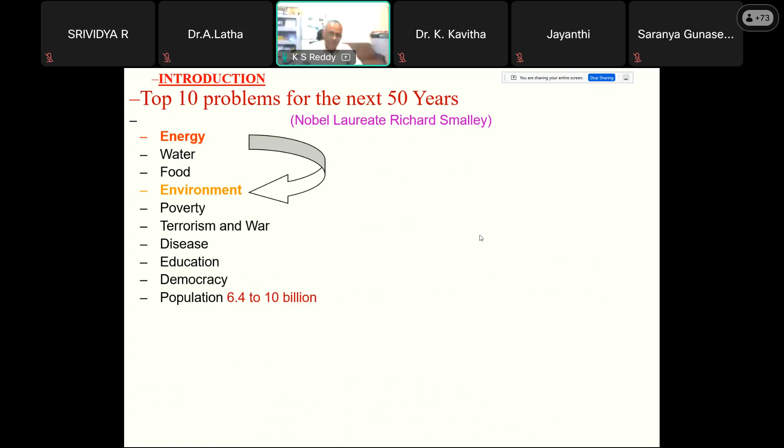If you look at it, we are facing several problems, and if you summarize these problems for the next 50 years, we have energy, water, food, environment, poverty, terrorism and war, diseases, education, democracy and population. These are all problems which are facing across the world, but the topmost one is energy. And if you try to address the problem of energy, we have to also address the problem of environment. Energy problem cannot be addressed in isolation. So therefore, energy and environment, they go together.

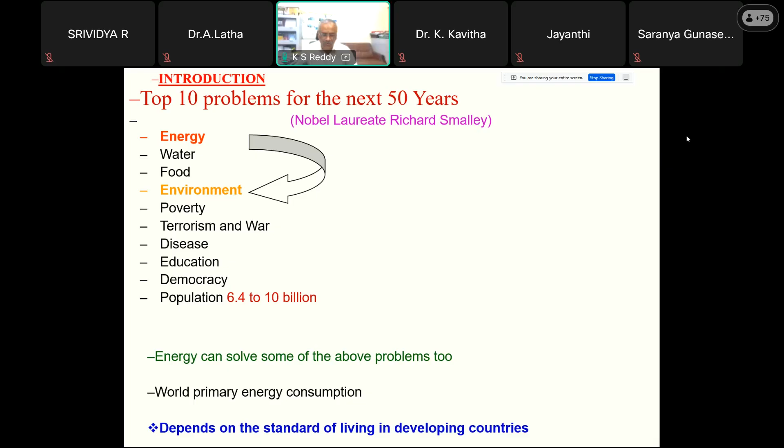Energy can solve some of these problems, and world's primary energy consumption is rapidly increasing based on per capita energy consumption, improving standard of living, industrialization, and population growth. Any nation's standard of living is primarily dependent on energy consumption. If a particular country or individual consumes more energy, that means it is more wealthy. Therefore, energy is one of the primary indicators of standard of living.

If you look at energy sources, there are broadly two types. One is celestial or income energy, which comes from outer space to Earth's atmosphere. These incoming energies include solar and lunar energies, which we refer to as non-depletable, including electromagnetic gravitational particle energy from stars, planets and the moon, and potential energy of meteorites entering Earth's atmosphere. But if you look at the quantum of energy reaching Earth's atmosphere, solar is the major fraction.

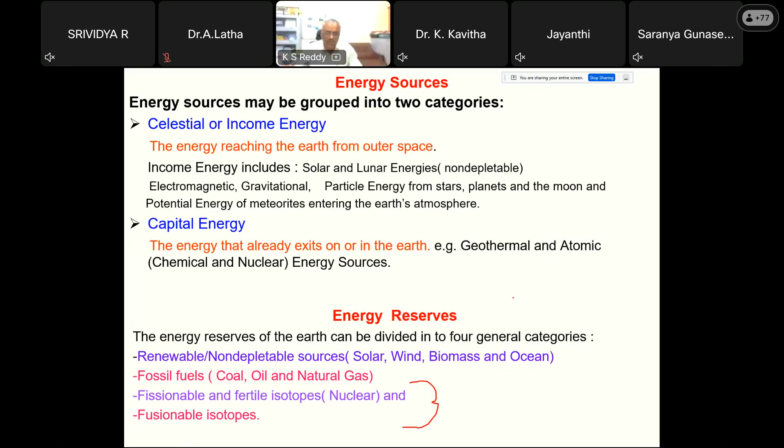Energy reserves are broadly divided into four categories: renewables, which are non-depletable sources like solar, wind, biomass and ocean; fossil fuels - coal, oil, gas; and nuclear, in both fission and fusion forms. Nuclear energy in India is gaining momentum, as in this budget a substantial amount has been allocated for nuclear reactor design and development, mainly for smaller reactors. If you look at the energy system hierarchy, we have energy sources including fossil fuels like oil, gas and coal, biomass, nuclear and renewable energies.

These are transformed into secondary energy carriers, either electricity or liquid fuels, and ultimately they have to be used as per the consumer choice, either for mobility or buildings. But in this conversion process, greenhouse gas emission is an important factor.

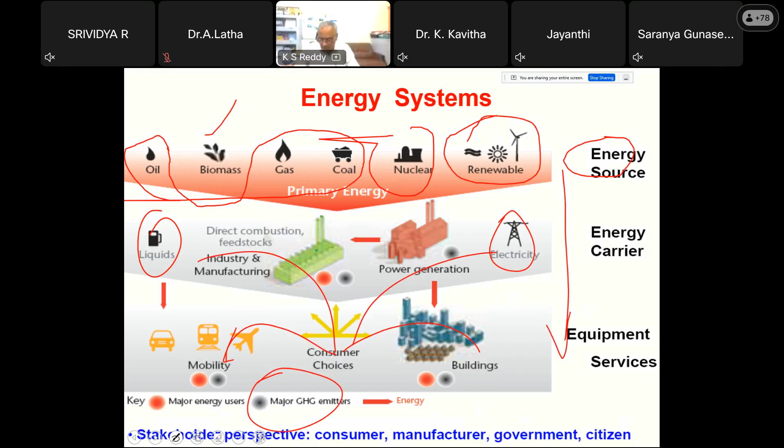If you look at these energy services and sources through the timeline, industrialization started in the 1870s, and pre-industrialization there was no commercial use of fossil fuels. Coal started being utilized in the 1870s. If you look 100 years back, in 1770, there were no fossil fuels - it was primarily animal power, with hay as input, and the production of this fuel is primarily from sunlight.

After industrialization, commercial utilization of fossil fuels like coal and gasoline started every 100 years. Now, if you look at the pathway from fossil fuels - high calorific value fuel to low calorific value fuel to high calorific value - if you look at coal, oil, gas, these fuels are hydrocarbons, and hydrogen content plays a substantial role. If you increase the hydrogen content, that means it's a better fuel, so instead of having one constituent in a fuel, it's better to go for complete hydrogen.

Therefore, in future, by 2070, the Indian target is to achieve net zero condition, so hydrogen is going to be one of the major fuels for the future. If you produce this hydrogen by renewable energy, then it's called green hydrogen. So in a smart energy environment ecosystem, hydrogen plays one of the key roles. Hydrogen economy is a major player in the future energy scenario. We talk about India's net zero scenario, and now we are talking about 2047, which is a developed nation.

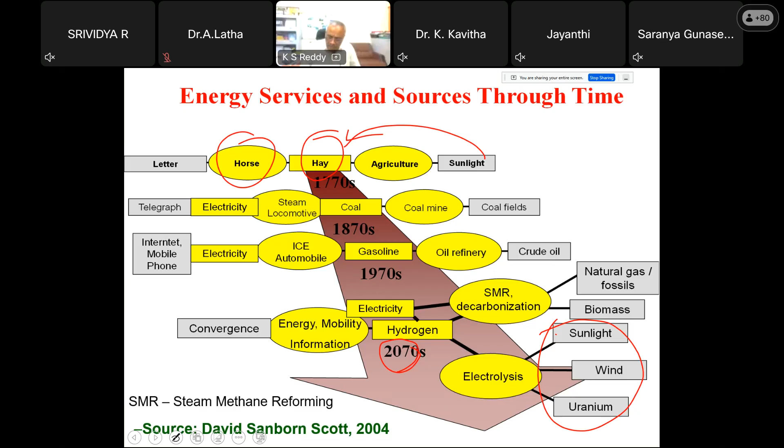So therefore, in this developed nation, sustainable energy solutions can play a major role to make energy sustainability.

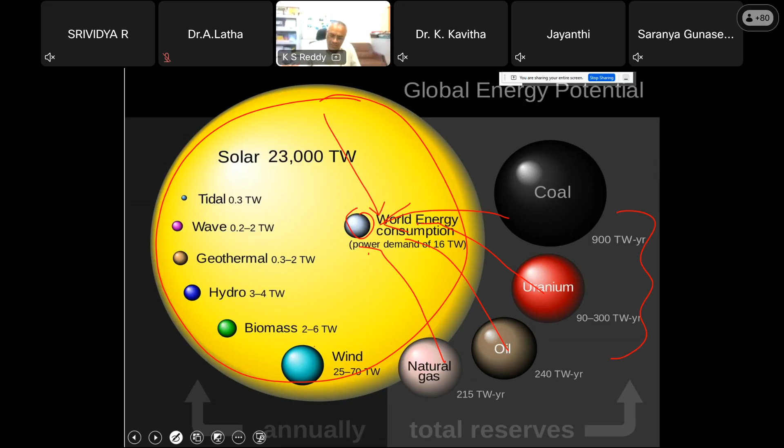If you look at the global energy potential with the present energy consumption, this consumption is being met by various energy sources. Each circle represents these quantities, but the demand is one here. If you look at the bigger circle, which is solar, it is infinite and inexhaustible, and can supply indefinitely to the world's energy source. So therefore, the renewable energy sources play a substantial role for the future energy scenario.

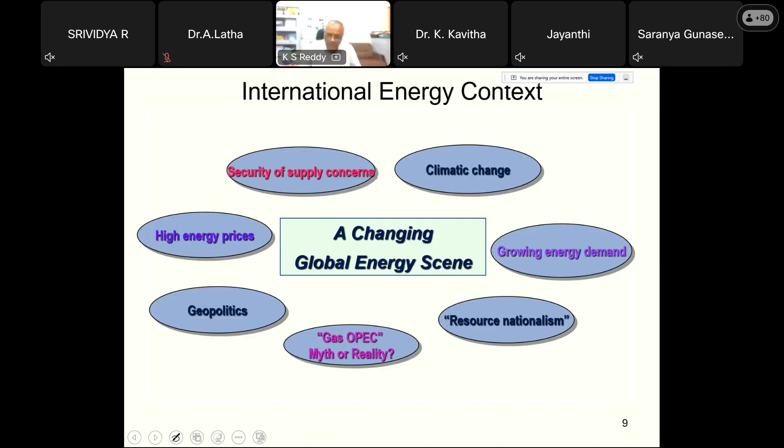If you look at in an international context how the global energy scene is changing, as you know, geopolitical instability and geopolitical unrest are playing a major role as far as the energy scene is concerned. You have high energy prices, security of supply concerns, growing energy demand, climate change, geopolitics and resource nationalism, all as major issues. And again, OPEC countries and oil price volatility is another major issue.

So this energy supply is primarily driven by goals and drivers. The goals of energy are accessibility, availability, acceptability, and the GDP drivers are GDP, energy demand, and energy supply. These are dynamically balanced with various other factors like demography, environment, institutions, pricing, and technologies. So therefore, the energy scene is primarily driven by its goals and drivers, and various other factors.

So generally, I propose a 6A criteria for the energy scenario: accessibility, affordability, acceptability, adaptability, appropriateness, and assurability are the major factors which govern the energy supply and energy demand.

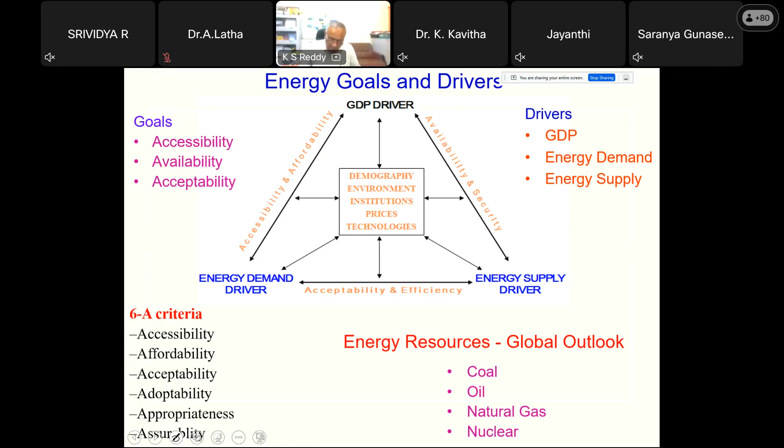So if you look at energy reserves at the globe, coal, oil, gas, and nuclear are some of these, which are now predominantly supplying the global energy demand. But of course, renewable plays an important role, though it's gaining momentum slowly. So in future, we expect the renewable energy sector to play a substantial role, especially in smart environment conditions.

So the current oil reserve to production ratio - oil is one of the fossil fuels. If you look at oil's current reserve to production ratio, it's somewhere around 40 years. After 40 years, we don't know what the situation of oil will be. If we consume or produce at the same rate as present, world oil can last another 40 years.

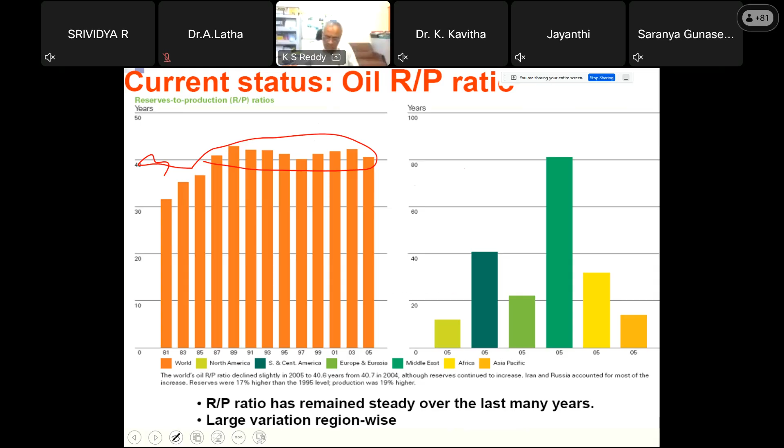So therefore, after that, what happens? And even if you consume indiscriminately, what is the effect of this on the environment? So then we need to go for new resources, new fossil fuel resources. That means we have to go deeper and deeper. And as you go deeper, you may find new resources, but ultimately the cost of production will also increase, and at one stage it may not be viable.

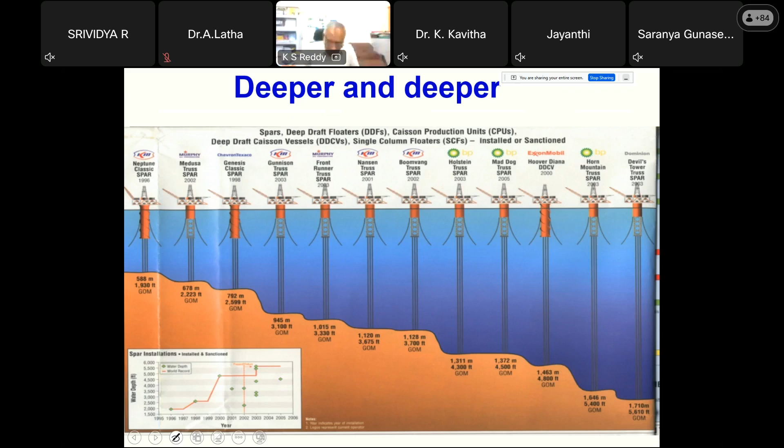So sustainability is a major factor in any energy source reaching the end user or end of the chain. We feel we deserve a sophisticated, luxury kind of environment where we get all the energy resources at our disposal, but the problem is the security of supply is a major concern.

To avoid this, we have to go for sustainability. The earth is bluish in color when viewed from a distance, surrounded by the atmosphere. We are consuming energy indiscriminately on the earth's surface, and because of that, the earth's atmosphere is getting imbalanced — we are overloading it with pollutants, so it is getting disturbed.

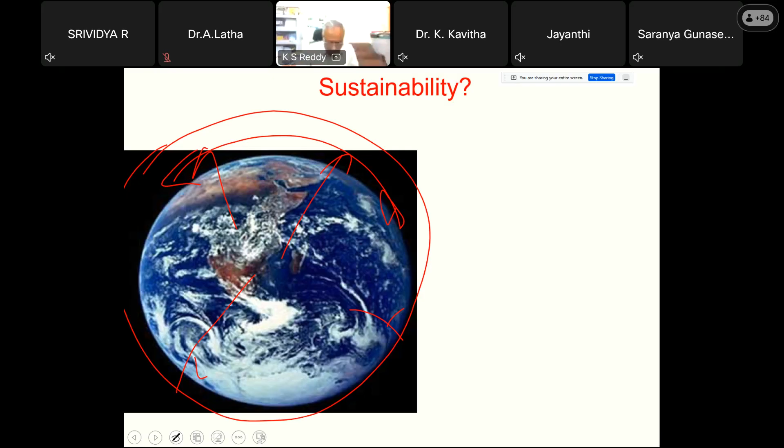Climate change is a major challenge. Recently you have seen the Californian fire and how it played a major role, and how Indian weather conditions are changing. Climate change is very important. Any overloading is a dangerous phenomenon — if you overload any system, it will get imbalanced. If you pollute too much, even our Delhi weather conditions will get disturbed.

Therefore, energy resources sustainability is very important, and resources are limited. Without technology, they will extinct after some time, so we have to go for technology. This technology keeps these resources for the future, so sustainable development is an important criteria here.

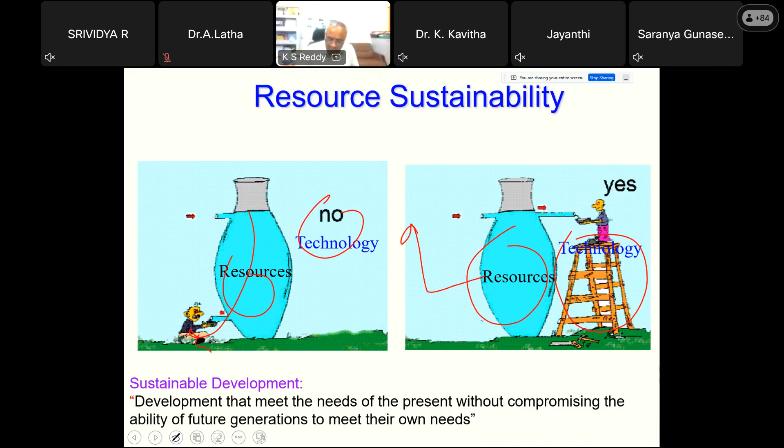Sustainable development means the development that meets the needs of the present without compromising the ability of future generations to meet their own needs. That means you consume your share, but keep the future generation's share as it is. Otherwise, it will get imbalanced and the future generation will be in trouble. So as far as energy sources are concerned, please try to consume your own share — that is what we can attain.

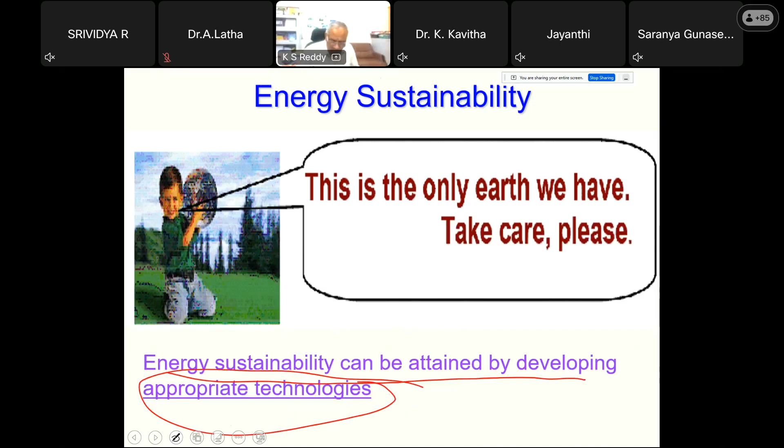The future generation says there is only one earth, take care of it please. So energy sustainability can be attained by developing appropriate indigenous technologies — it's your technology, your nation, your technology can cater to your needs. So what to do? It's your money, your environment, your mission readiness.

So you have to conserve your earth, otherwise it will have substantial climatic impacts. The right thing to do is go for renewable energy technologies for making smart conditions. There are several renewable energy technologies, and renewable energy technologies are mainly solar energy technologies.

It's broadly classified into direct and indirect. All renewable energy technologies which are a manifestation of the sun's energy are called indirect renewable energy. Those include water power, wind power, biofuel, biomass, and ocean.

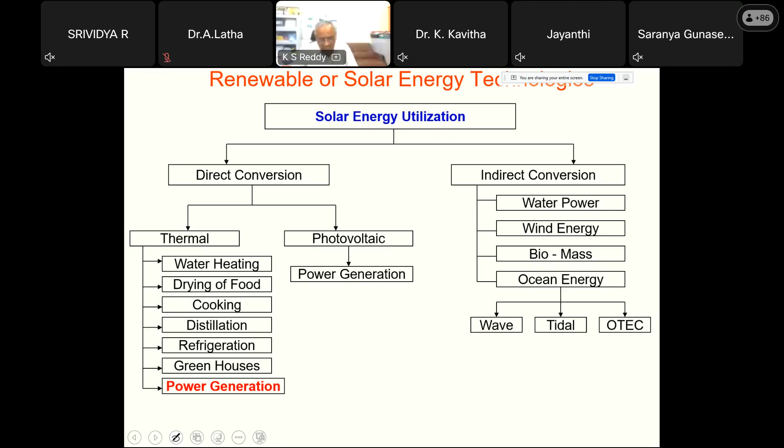Whereas there is direct energy conversion from solar to either thermal heat or photovoltaics to get electricity. The thermal route can be simpler and sometimes more efficient, but you need to convert it into high grade energy like work. The thermal conversion includes water heating, drying, food cooking, distillation, greenhouse applications, and power generation.

Sustainability is a very important aspect now. Renewable energy technologies can untangle the triple bond of development, energy, and environment. Sustainability is primarily governed by security of supplies, economic efficiency — that's the development — and environmental protection. We have to keep the environment safe and clean.

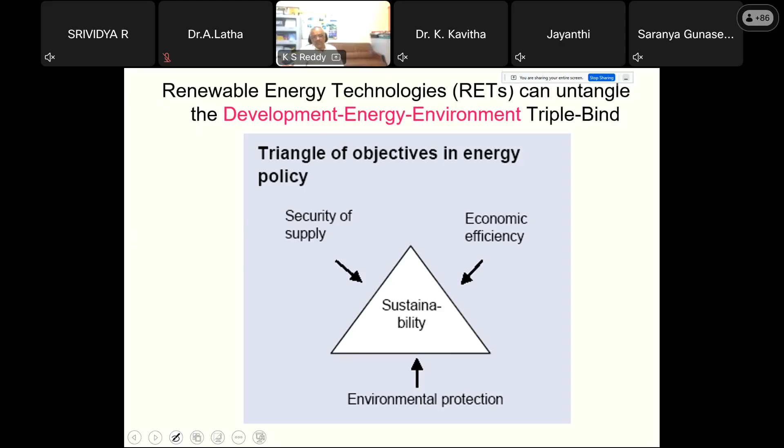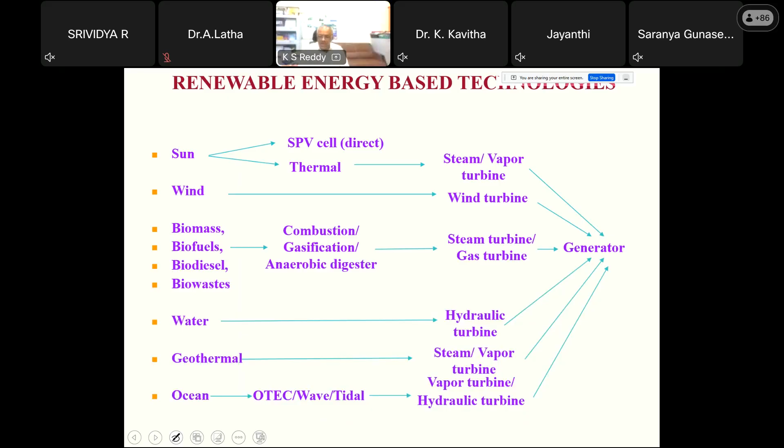Sustainability can be attained only through the development or implementation of renewable energy technologies. There are several renewable energy technologies: sun's energy, wind's energy, biomass and biofuels, biodiesel, bio-waste, water, geothermal, and ocean. Ultimately, they need to be converted into useful, high-quality energy by the generator.

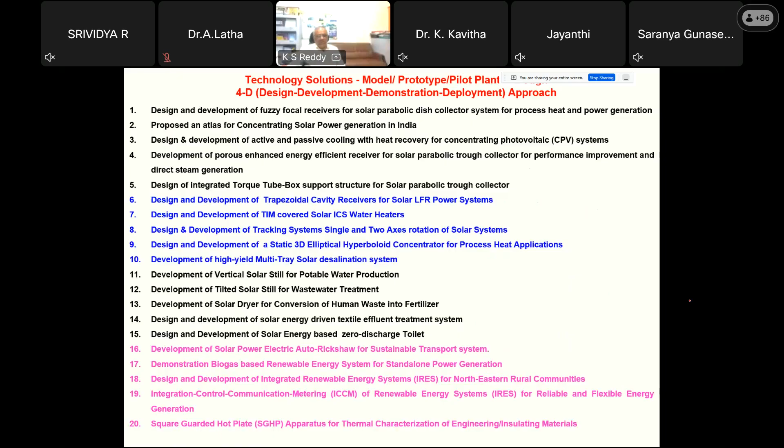As mentioned earlier, in a smart technology approach, we have developed several technologies in the solar system. These are a few technologies I've listed out. Our approach is a 4D approach: design, development, demonstration, deployment. Through this approach, we have developed several technologies, and I'll show you some of these.

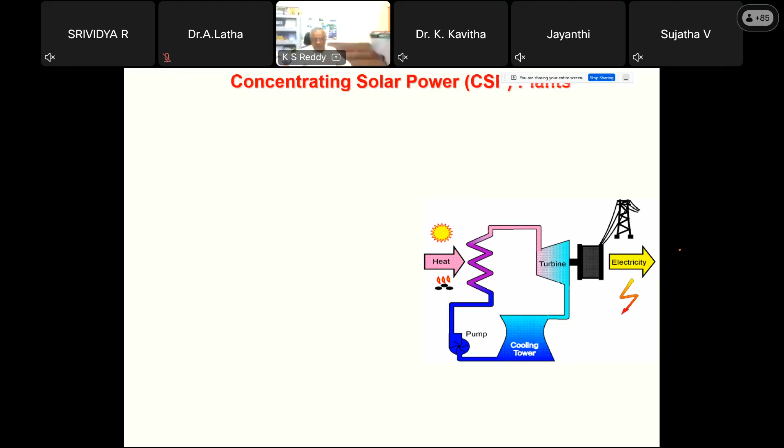As I mentioned, a sustainable environment is a major challenge. Now, power generation and electrical energy generation is primarily supplied by fossil fuels like coal. If you burn coal and produce power through a Rankine cycle, that is a conventional power plant. If you replace the fossil fuel with solar, then it is concentrating solar power.

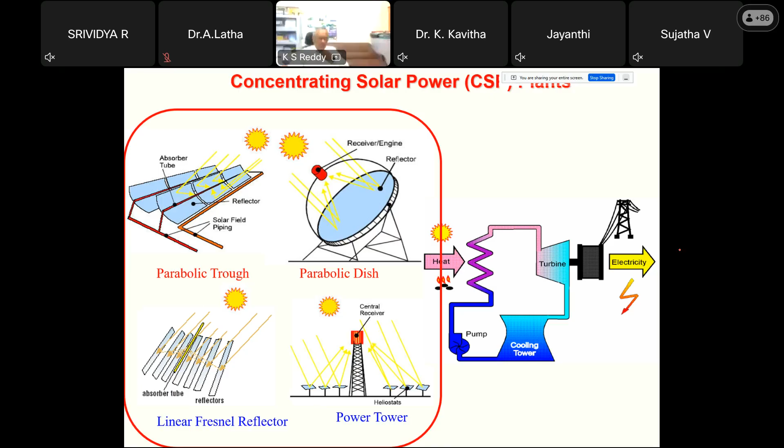There are 4 technologies that have reached the level of maturity to integrate into conventional or thermal power plants. These technologies, which include parabolic trough, parabolic dish, linear fresnel reflector, and power tower, play an important role. They have their own spaces in their technology domain, and some of them are more efficient, others less efficient, but ultimately they are instruments in making more sustainable power.

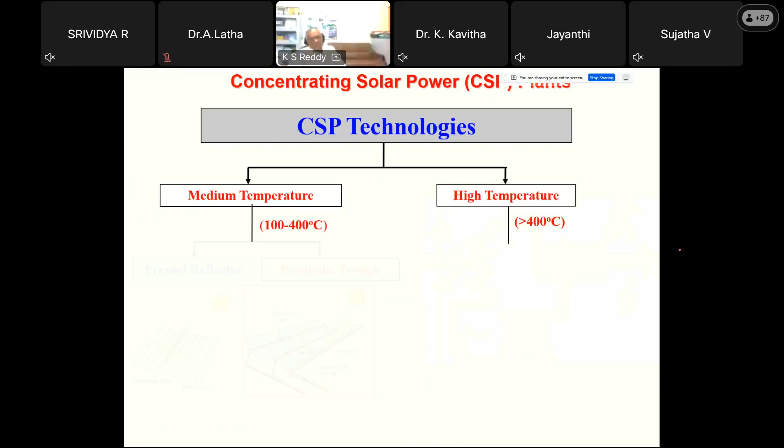The CSP technology, based on the temperature range, is broadly classified into 100 to 400 degrees and above 400. So high temperature and medium temperature energy is produced by these respective technologies for power generation. We developed these technologies at IIT Madras at different scales of operation.

Our approach is a 4D approach: design, development, demonstration, deployment. At the demonstration scale, we have a parabolic dish which produces 640 degrees Celsius at 15 kilowatt thermal and 67% efficiency.

We have a photovoltaic system with tracking, so it tracks the sun so that overall efficiency is higher. We have a desalination plant, parabolic trough collectors for process heating, concentrating photovoltaics for both electricity and water production, and instrumentation to measure that. So this is all at the demonstration scale.

These are largely demonstration scale technologies, and they can be taken to the field. We have transferred technologies to some industries where they have taken it to the field.

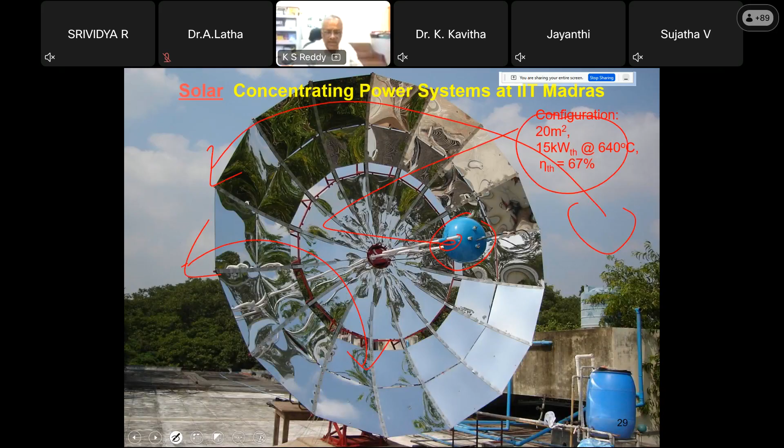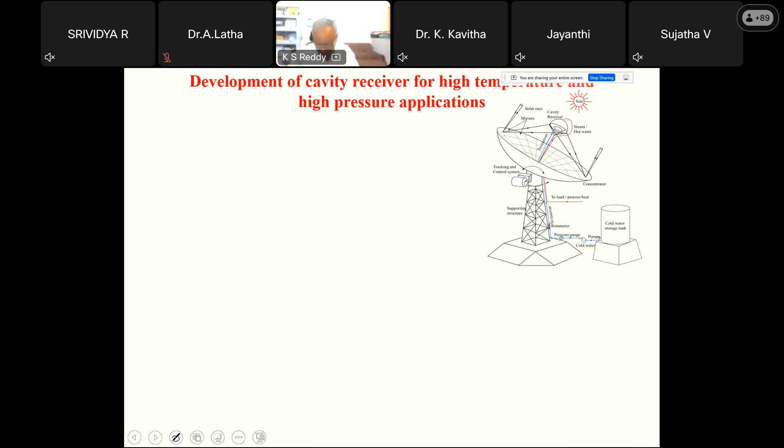Looking at the technology, a parabolic dish collector is a concentrator which produces high temperature heat by reflecting solar radiation onto a receiver. The specifications require that it be tracked as the sun moves from east to west. The tracking system keeps the solar collector in the direction of the sun, and the concentrated radiation comes to the receiver.

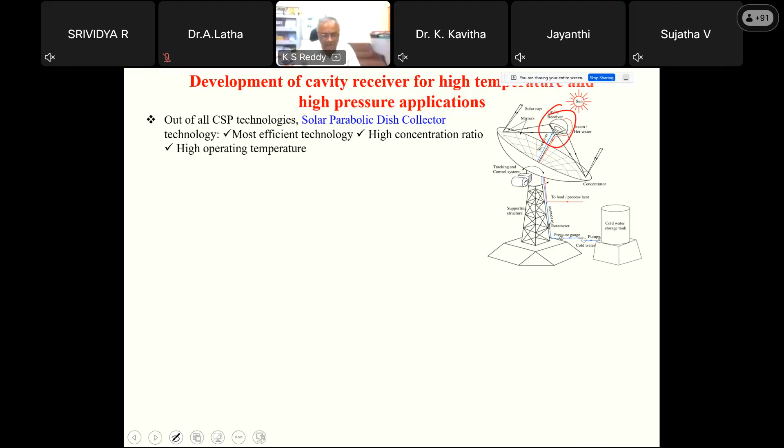The parabolic dish collector is the most efficient technology because we get higher temperatures. The design of the cavity receiver is important not only for production of heat but also for fuels production like hydrogen and so on.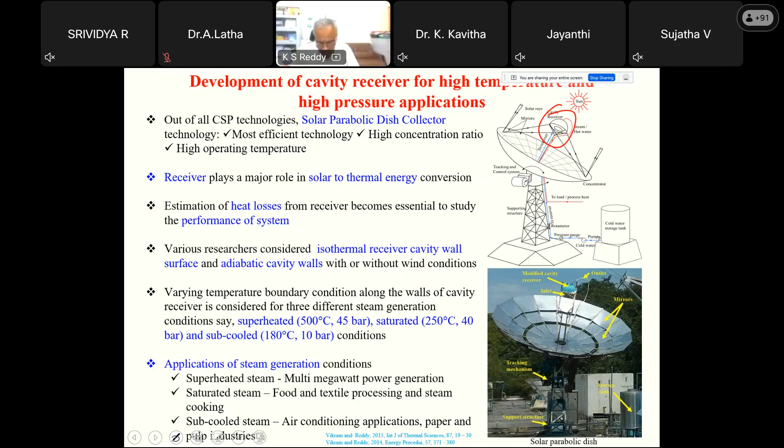When we go for large scale power generation, we need to go with the field, and land area requirement is a major challenge nowadays in India because land becomes expensive. So we cannot afford high land area for this. In order to minimize the land area, we did field analysis and studied operating conditions.

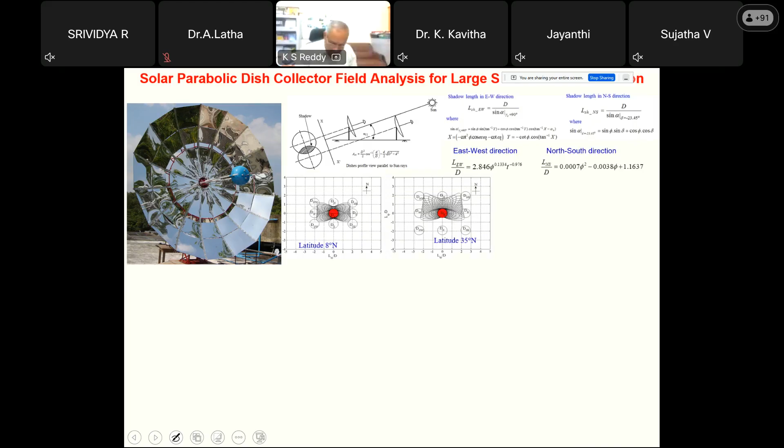We worked across the entire country, from Kanyakumari to Ladakh. Kanyakumari latitude is about 8 degrees north, and we studied up to 35 degrees north, and made an atlas to come up with power generation potential across India. Wherever the green points are, they are viable; blue points are conditionally viable; red ones are not viable at all.

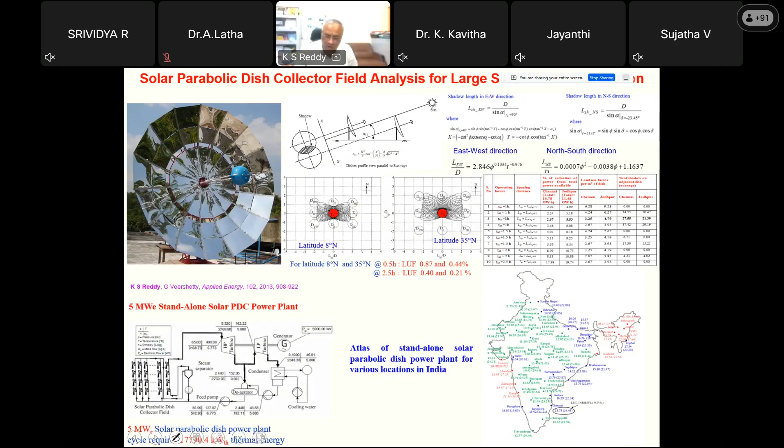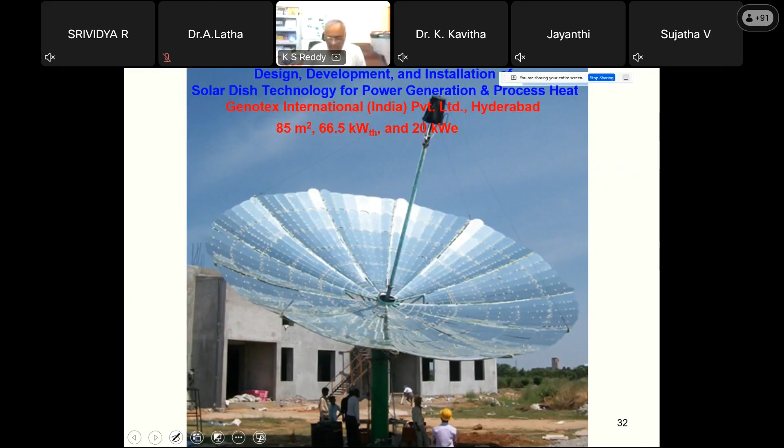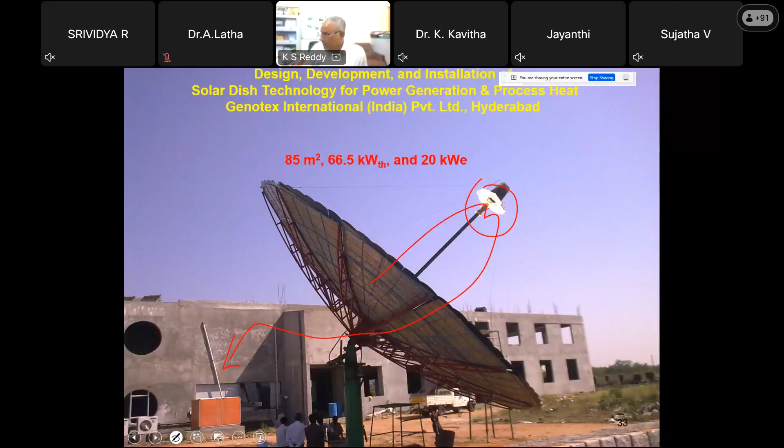These can be extended to other conditions. Renewable energy integration in the pharmaceutical industry is another important idea. This dish we integrated with a pharmaceutical company. The receiver produces heat, and this heat is supplied to the pharmaceutical industry.

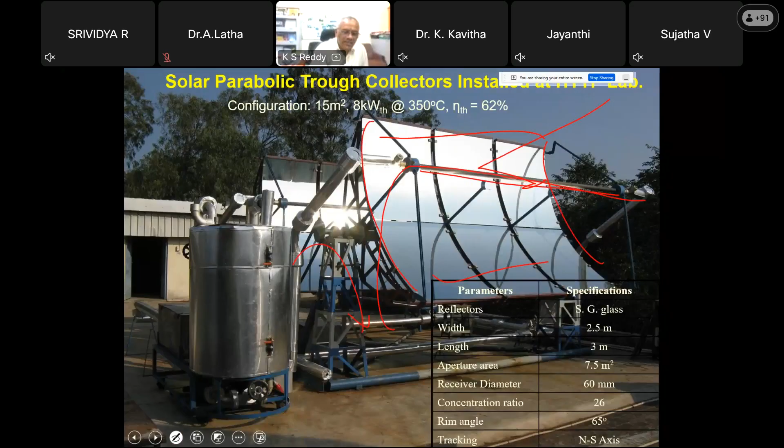Another one is the parabolic trough, a line focusing collector. You have a parabola, and the rays that fall on it are reflected onto a line. When you send the working fluid here, you get hot fluid, and you can use single axis tracking to produce high temperature.

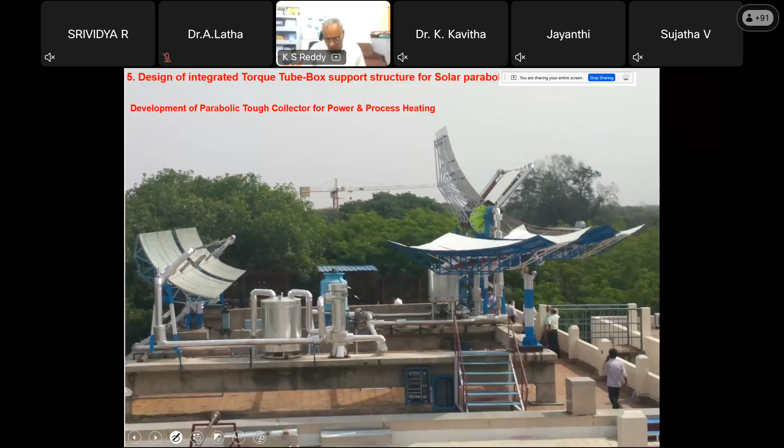This massive setup is in our lab at IIT Madras, mainly a mini power plant used to characterize the technology, especially process heat and power generation technologies.

All of these we work on with industry collaboration. Another dish technology includes a square dish and a circular dish. Both concentrate solar energy onto the focal point; this one is used for air conditioning applications, and this one is for process heat applications.

So this is a 40 square meter dish, and this is about 36 square meter dish. So you can see them here. And we also work a lot of characterization as an indoor experiment.

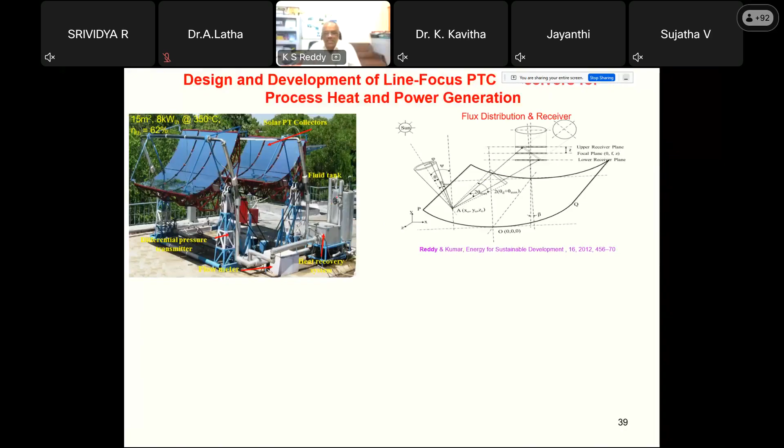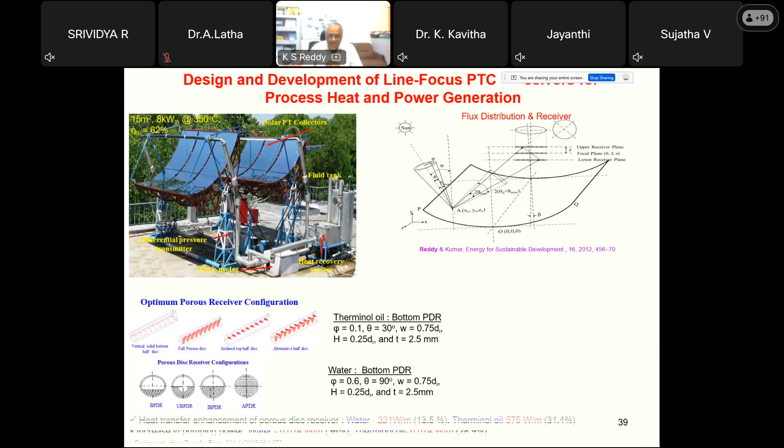So you see this parabolic, because here when you do a technology demonstration, it has to be from various aspects, from optical to thermal to structural. So as a designer of a technology or an inventor of a technology, it has to be a comprehensive analysis.

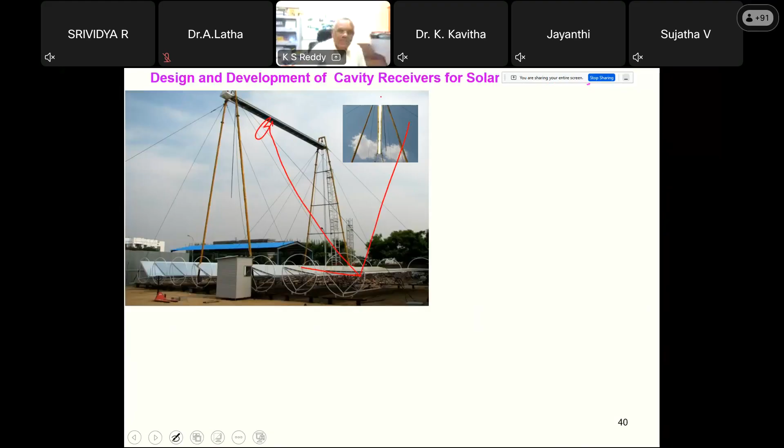We do optical analysis, thermal analysis, and structural analysis. So if you look at the LFR collector here, this is again a development of a small solar system which reflects radiation onto this. So the concentrated light is here, which you can see the concentrated focus.

Now you have seen the receiver development. The receiver is trapezoidal because we need to study both heat transfer and optical point of view. Here the heat losses from the receiver play an important role. So therefore, you need to do extensive analysis as a heat exchanger design analysis for the higher heat collection.

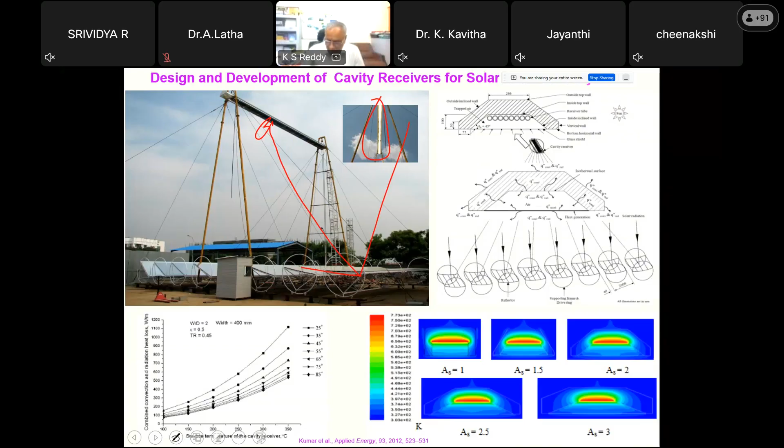Based on this design, we have installed a power generation system in a school. This is the Pathashala campus in Vallipuram, Kanchipuram district, to produce power, hot water, cooking application, air conditioning, desalination, potable water production, as well as air conditioning. So it produces multi products in terms of heat and electricity. There is energy storage which is stored inside so that it can operate in the night time as well.

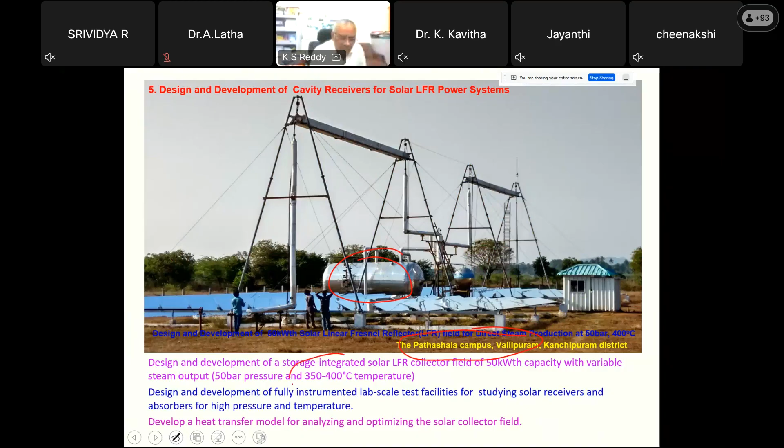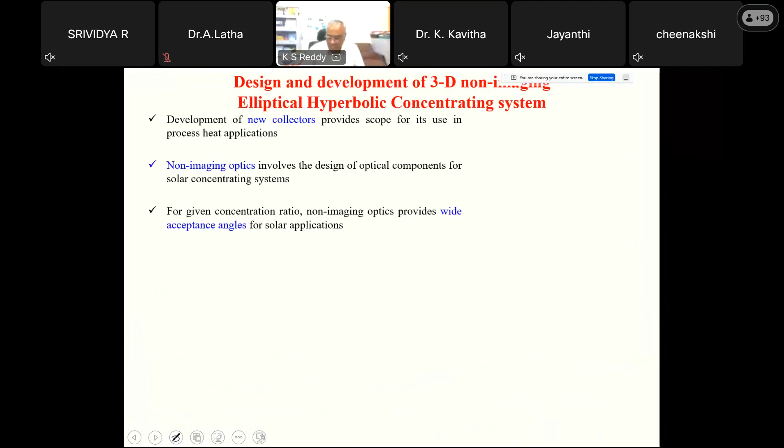So now you have seen the temperature ranges are high, and this is the renewable energy integration for smart conditions. Then we also developed non-tracking elliptical 3D non-imaging concentrators. Mainly these are new innovative concentrators for low temperature applications, and they can be integrated. You see that these profiles are hyperbolic and then parabolic concentrators.

The solar radiation is collected at the bottom and then used for desalination applications. And the receiver is an inverted cavity receiver, which plays a role, mainly used for collecting the concentrated radiation most effectively and with a minimum heat loss.

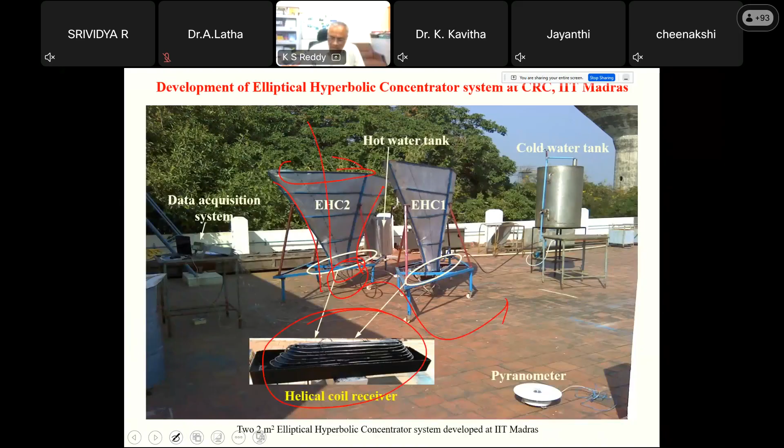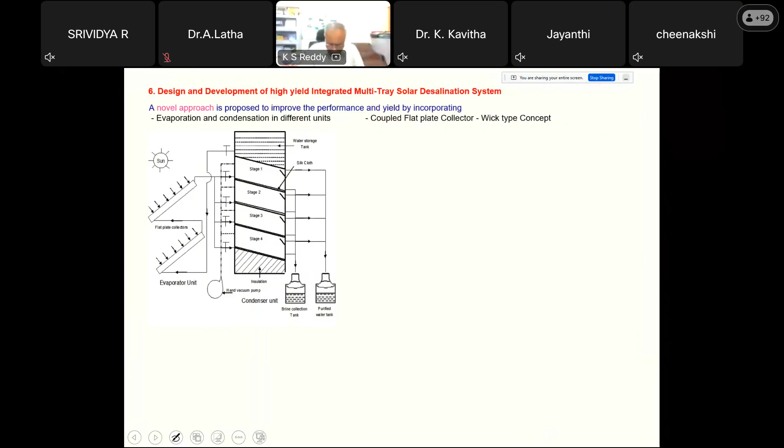So these are some of the configurations, and this can be effectively integrated with desalination. Potable water is one of the important needs. You see that everywhere water is there, but you cannot use the water. Most of the water bodies are polluted. So therefore, how to convert the saline water or brackish water into potable water, and that can be done by a solar system, which is a sustainable solution for water production, because now you have seen RO, we are buying water in bottles. So therefore, this is a solution.

This solution can not only be used for potable water production, but also wastewater treatment. So suppose effluents are now just simply sent into the water bodies. Before sending into the water bodies, they have to be cleaned and treated. So therefore, water treatment is very expensive, cost intensive process. So therefore, utilizing the fossil fuels is another problem for the environment. So therefore, it's better to use solar energy for wastewater.

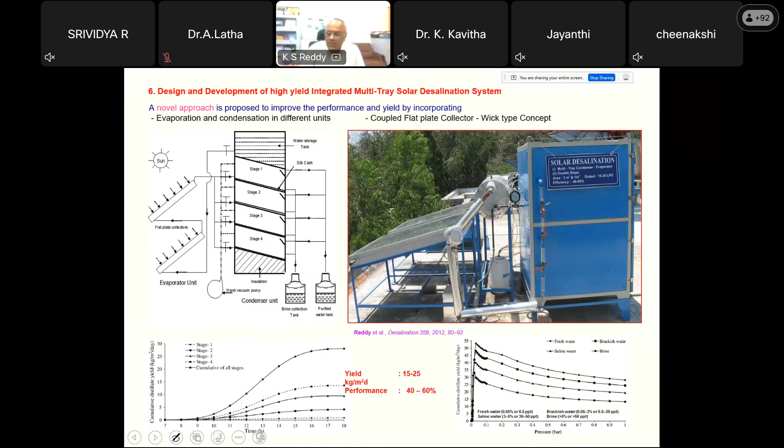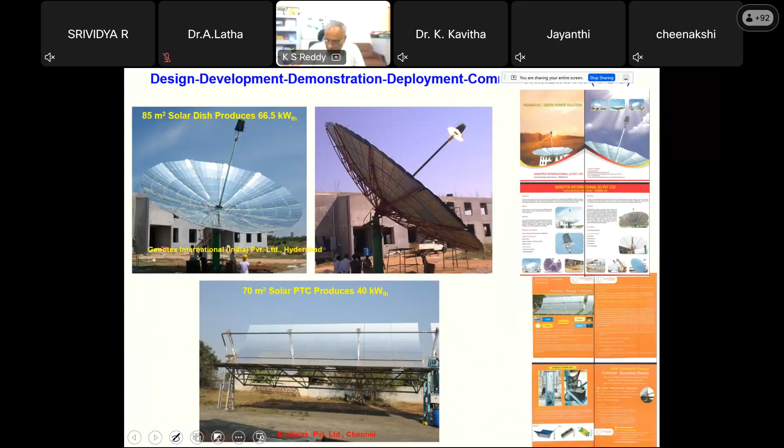So we studied for various waters like saline water, brine, then brackish water, and so on. And this is the technology which our technology associates collaborate with us on, and they take it to the market. Some of these I have already shown this technology.

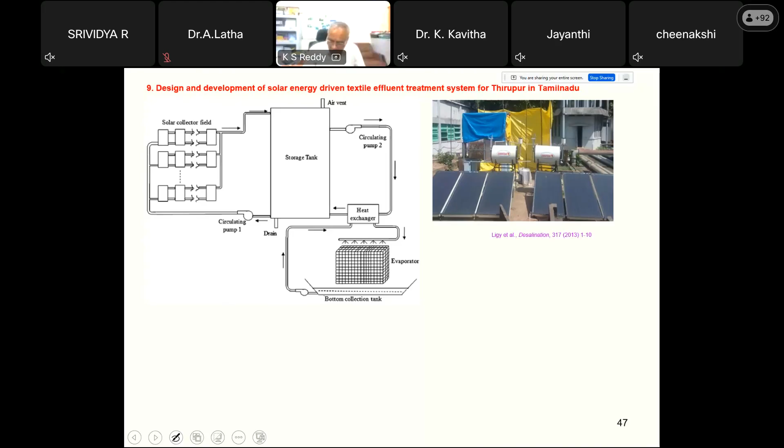And now another one is a textile effluent treatment. As I just mentioned, not only potable water treatment but also effluent water treatment is important. So therefore, we used our technology mainly for textile effluent, where especially in Thirupur area, the textile effluents are rejected into this. So therefore, the treatment is a major challenge and it's a cost-intensive process. And this cost-intensive process is making Indian textile become uncompetitive as compared to the Bangladeshi and other textiles. So we worked on this and came up with a solution for treatment of this.

Another one is a mobility in a smart environment.

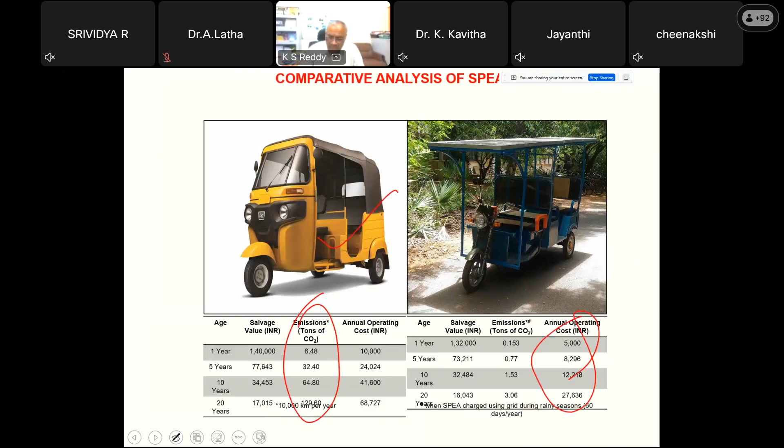Mobility is important now, as smart mobility plays an important role, especially green mobility like renewable energy or solar integration with mobile systems. This development was compared with conventional mobility, looking at emissions as well as annual cost, and we found it is more viable with much lower emissions as compared to conventional mobility applications. So we have developed this green technology.

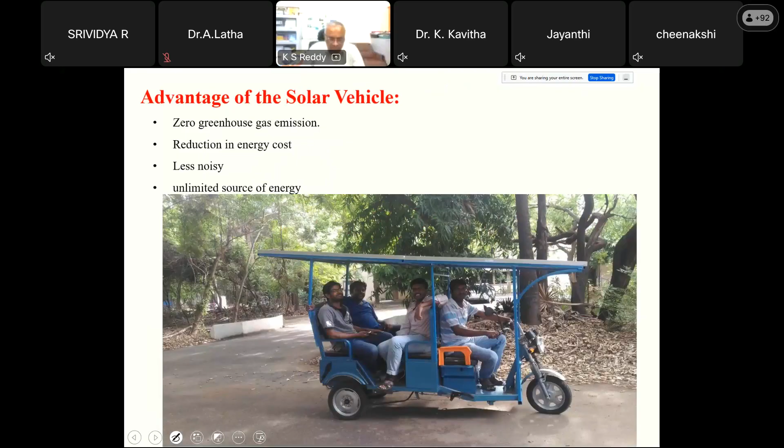This green technology means zero greenhouse gas emissions, reduction in energy cost, less noise, and an unlimited energy source in solar. Our students have done load and road condition tests here on campus, and we can work on an integrated collector solar system, which is simple and can give a solution to the hot water system.

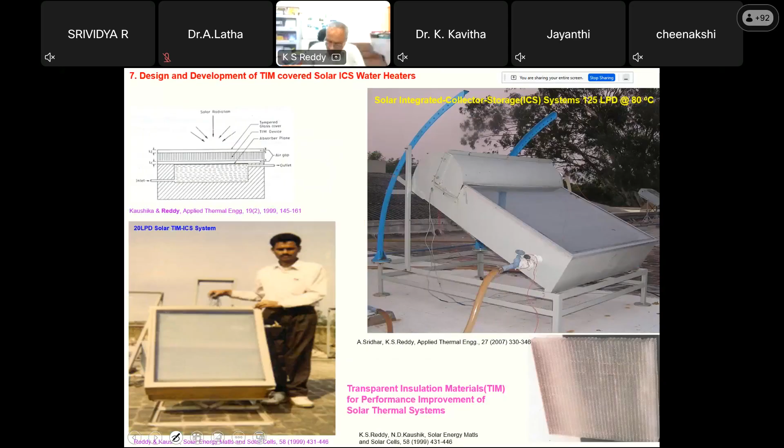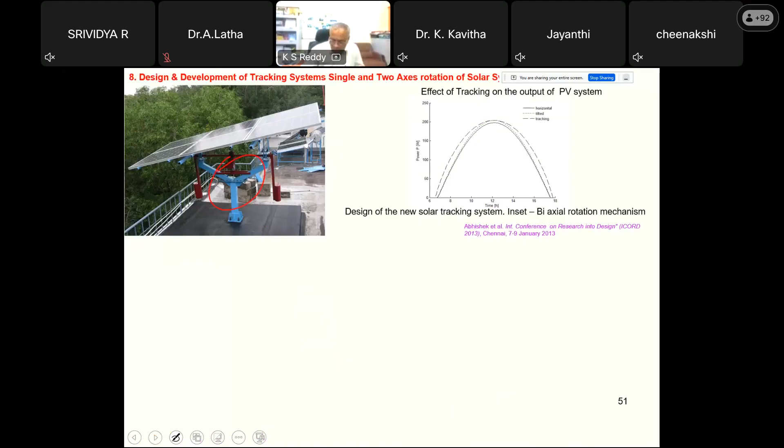And the flat plate solar PV panels are to be tracked with a tracking system. We developed this tracking system which is more efficient and delivers higher power. Another important application is for cogeneration and trigeneration.

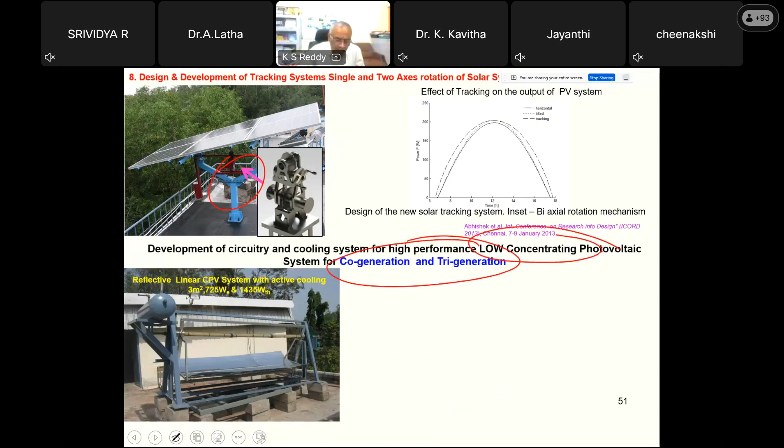Hello? Any problem? No, sir. You can continue, sir, if you have any questions please.

Some noise was there. Now, these linear Fresnel reflectors - in satellites we use solar cells, so satellites are powered by solar energy. Similarly, this triple junction solar cell can also be used in terrestrial applications, but with concentrators, which gives higher yield and higher efficiency.

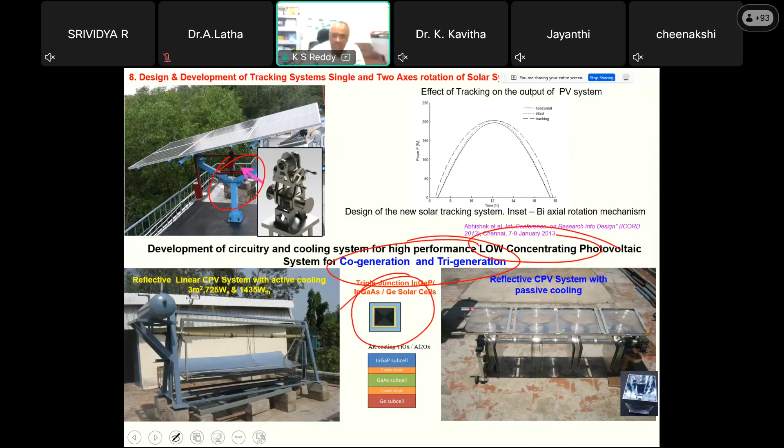When used in a cogeneration, trigeneration mode, they are more attractive. These triple junction solar cells use indium gallium phosphide, indium gallium arsenide, and germanium on a germanium substrate, as I have already explained.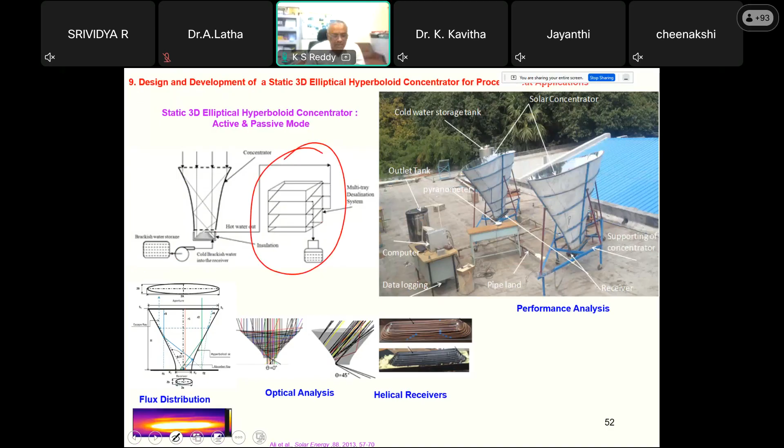When we use this, we mainly integrated this desalination plant with a hyperboloid collector, parabolic collector, so that we can get a higher yield. This I have already explained to you.

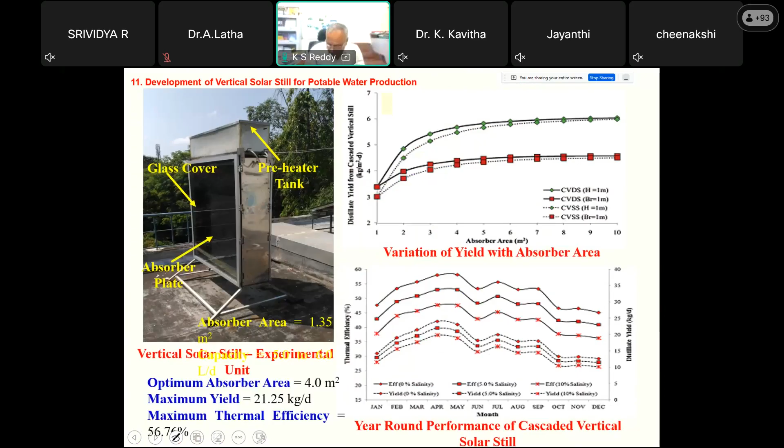There's another technology which produces potable water through simple technology. It's a vertical type of still that takes energy from both sides and works effectively within a smaller space. Your program is on smart systems, so this is very smart because it uses a small area, allowing us to use area most effectively.

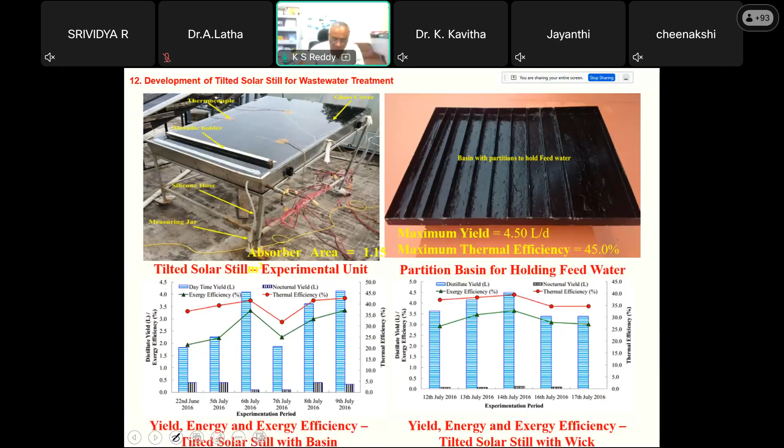Another technology is a multi-step process where wastewater can be treated, like textile effluent, tannery effluents, paper industry effluents, or domestic effluents, cleaned in a most effective way. We also developed a solar drying system for human waste, converting human waste into fertilizer.

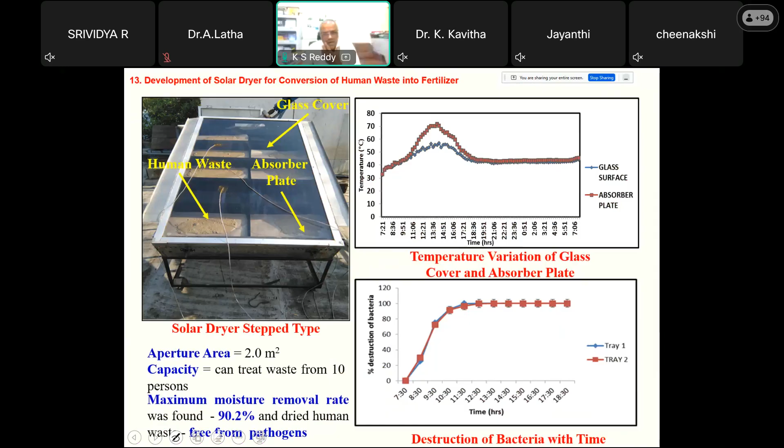Eventually, our objective, based on desalination and drying technologies, is to develop a net zero discharge toilet - zero liquid, zero solid discharge. Under Swachh Bharat, cleanliness is important here, so we developed this converting of human waste into fertilizer. We can also use that.

Another important area is smart solutions. The affordable net zero energy building sector in India is growing rapidly, and buildings are becoming energy intensive because most are air conditioned. The energy consumption is increasing, and indoor air quality is another challenge. So it is important to come up with an affordable net zero energy building, and as part of that, we developed a net zero energy building concept.

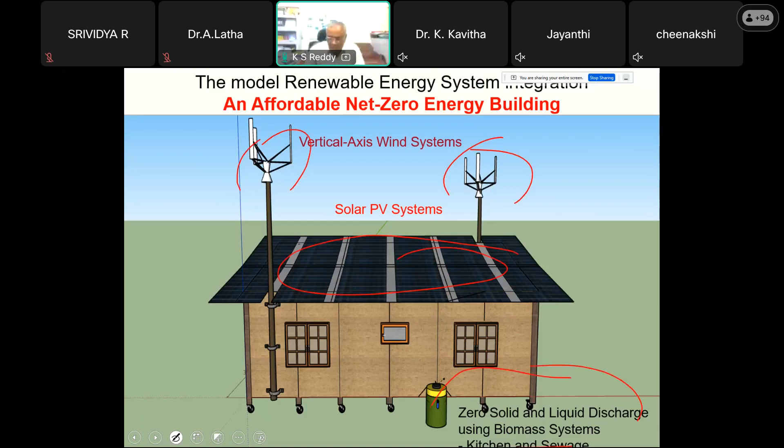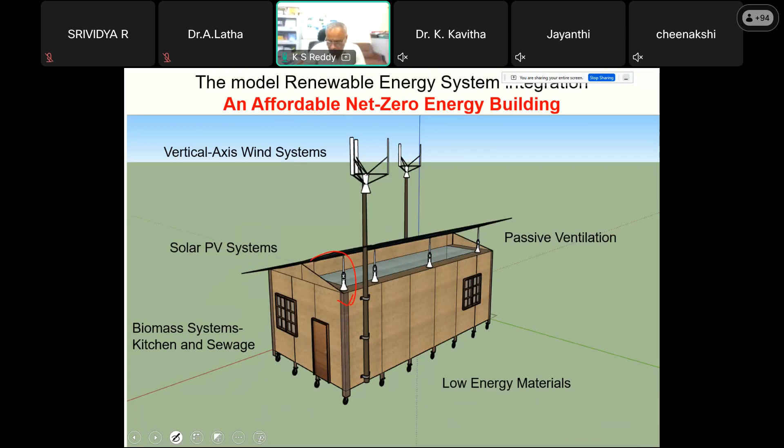This building is covered with solar and wind energy, and we have a solid waste approach - all integrated. It is also well illuminated and ventilated by changing the angle of the solar panels depending on the position of the sun at any point in the year. This approach is affordable and portable, so you can take it wherever you want, mainly installing it in an interior or remote place.

These are all small ones. So this is a complete net zero energy solution. We have also come up with a renewable integration with biomass, mainly in rural areas where there is no power supply.

We installed this in a tribal village in West Bengal, close to Visva-Bharati University, like Rabindranath Tagore's place. It is a full-fledged demonstration scale integration of renewable energy technologies for a smart environment. Here we have given power through biomass and solar plus battery storage.

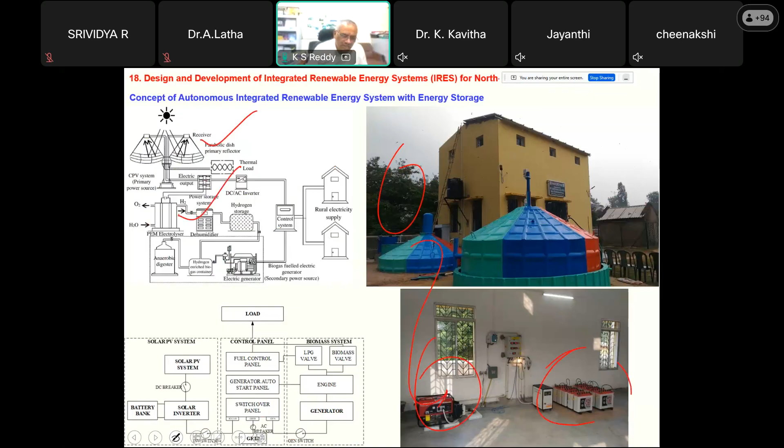This is a battery storage you have, and this biogas is converted into electricity by a biogas generator, which produces electricity. You can see here there are three sources: solar, and we also use electrolyzers to produce hydrogen. The hydrogen is supplied to the biogas to enrich this, and then you will get electricity.

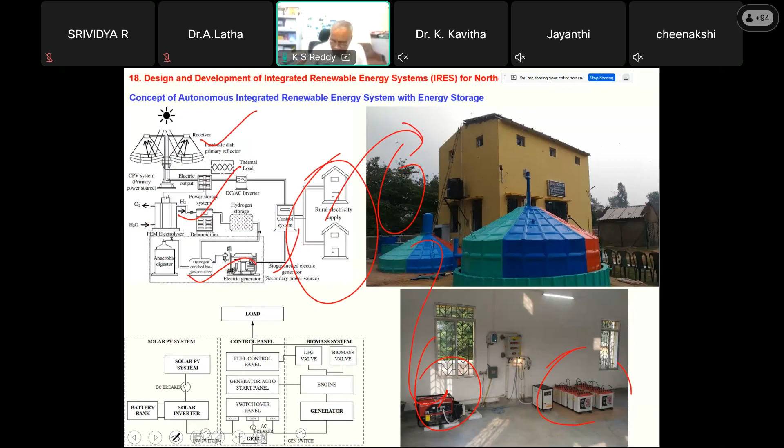This village is about 60 huts, 60 houses. A lot of research has gone into the development of these technologies. We worked at IIT Madras on all these technologies, and it's also connected to the grid to make it a more reliable operation. So with this, I will come to a conclusion on the smart... where is that?

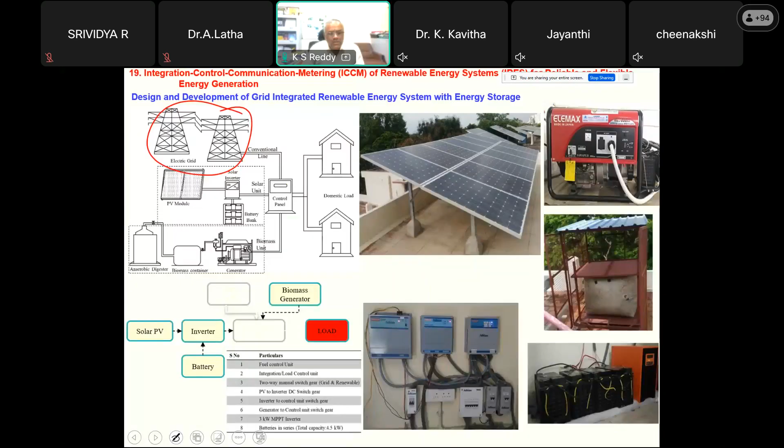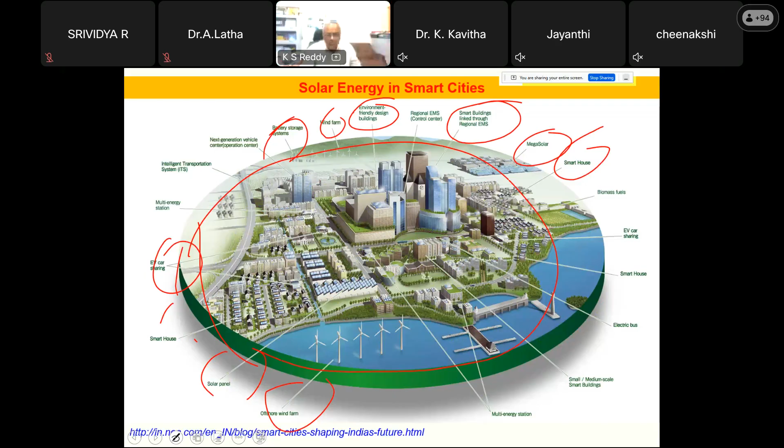So with this, I can conclude that the optimization of energy systems for sustainable development can be achieved by analytical, numerical, and statistical tools. System design plays an important role for viable conditions, mainly process heat and power generation. Sustainable energy technologies can be achieved through a design, development, demonstration, deployment, and commercialization approach. Therefore, in a smart environment, renewable energy integration is an important tool for achieving sustainability.

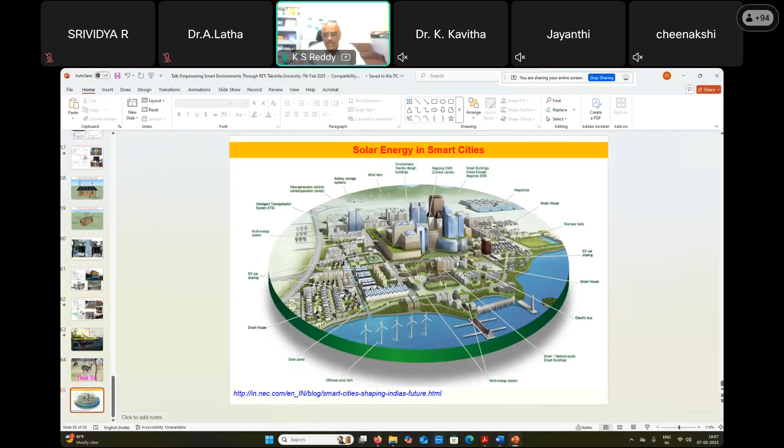Hello? Hello? Hello? Can you hear me? Yes, sir. What I completed my talk. So if you have any questions, please feel free to ask. Participants, if you have queries, kindly you can post in the chat box or you can unmute yourself and you